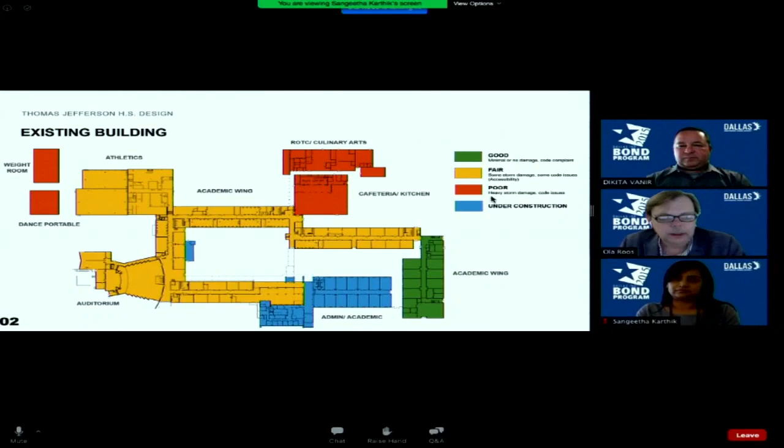So the intent here is to show the project development from the start, right after the tornado, to where we are today, and how we've incorporated the input from community and stakeholders along the way. So we're going to have about a 15-20 minute presentation, and at the end there'll be an opportunity for feedback and questions. So what we're going to talk about today is the schedule, the site plan, how it's been developed, traffic considerations, construction, and overall school planning.

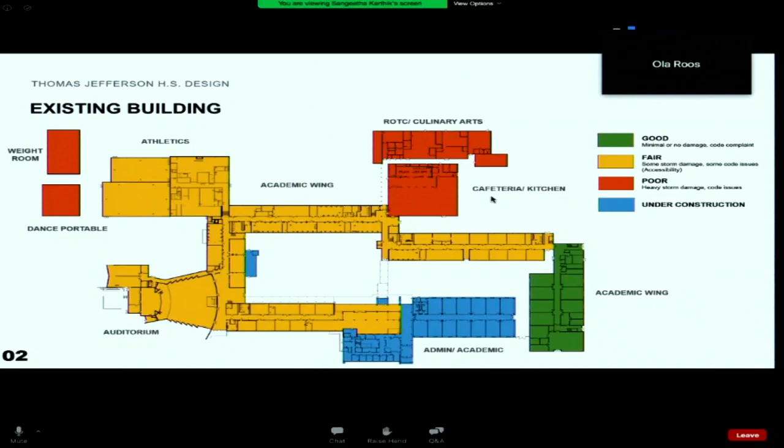So let's move on. Well, this is the existing school and assessment after the tornado. The portables were all damaged beyond salvaging. And the existing ROTC, culinary arts, and cafeteria got hit pretty hard and will be taken down.

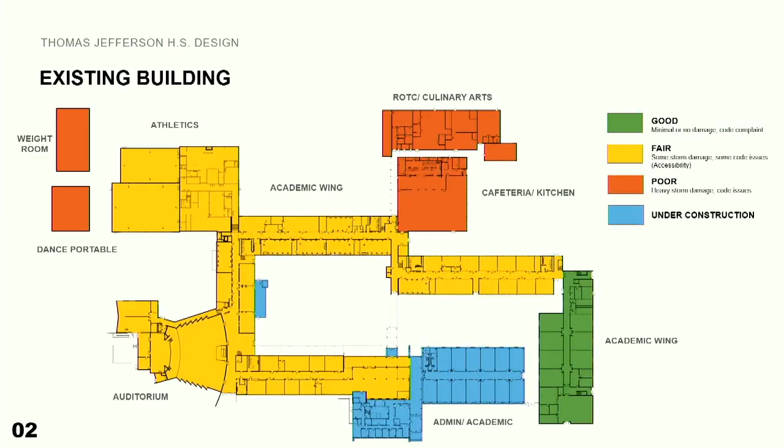So if we move on to the next slide. So what you see in yellow is what we're retaining from the existing Thomas Jefferson auditorium, the classroom wings, the academic wing, and the blue is a new addition.

We're adding an administration suite, a number of classrooms, new library, performing arts, additional athletic and physical ed, a proper competition gym, and we're enlarging the cafeteria and the culinary arts to be aligned with the current requirements, as well as their ROTC.

So we're renovating about 164,000 square feet of existing facilities and adding 133,700 square feet. Move next slide.

So this slide kind of outlines the scope a little bit more detailed. So as you see, we're demolitioning some of the 1956 building, the cafeteria, kitchen, culinary, ROTC, and the facility functions that were housed in portables, renovating classrooms, athletics, roofs, exterior windows, finishes, updates to the HVAC and auditorium. There's some renovations to the 2004 addition, and there is a fair amount of work on the site to bring it up to what's required.

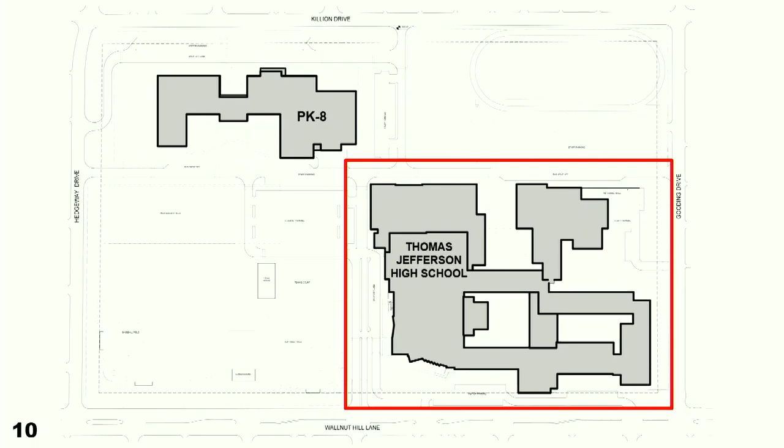One of the key concepts for the new reimagined TJ is about connectedness. We wanted to make sure that students had a seamless experience throughout the campus, no matter where in the building they were. So how did we do this? We wanted to add the additions in such a way that they stitch the building together, with continuity within the flow of traffic in the building.

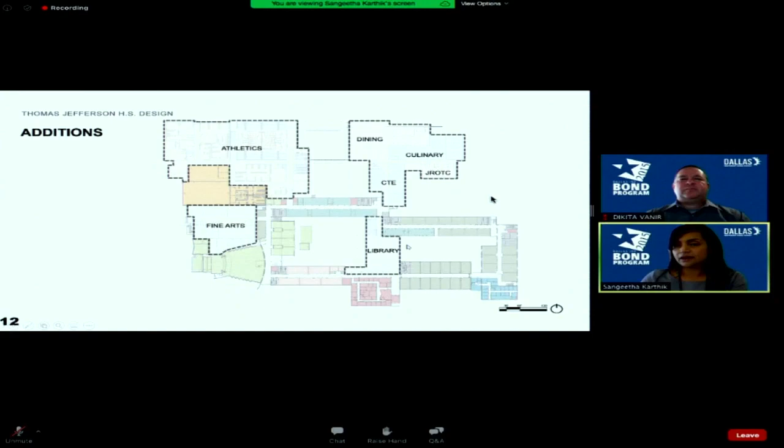So we've got the fine arts areas nestled by the auditorium. The athletic areas are connected to the old athletic areas that will be repurposed. Like we talked about before, the dining, culinary, ROTC, and CTE areas are going to be in the new addition. And more importantly, we envision the library as a node, a nucleus for the campus. This is going to sit right in the center, stitching the campus so that the circulation throughout the building is continuous.

We also wanted to make sure that students are connected to learning, and the building itself is connected to the community. So we made the outdoor spaces very purposeful. We envisioned collaboration spaces throughout the building, some small, some large. The library itself is a huge collaboration space right in the heart of the school, where students can learn, work, and interact with each other.

The interior courtyards will be more of an outdoor learning, student courtyard type of space. And the community plaza is going to be the green space between the gymnasium addition and the cafeteria addition.

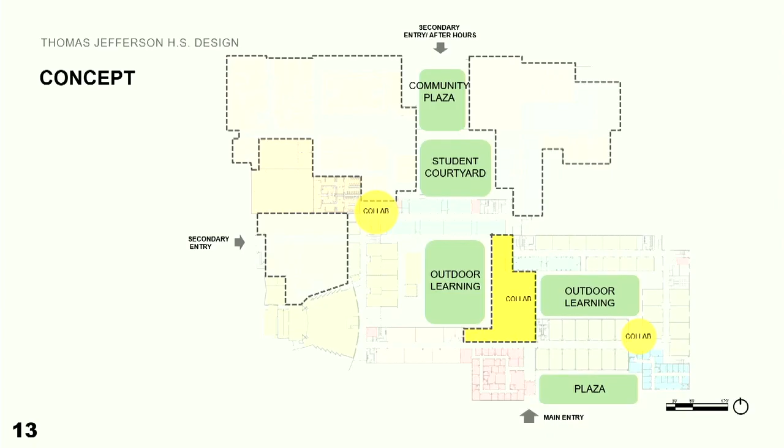Looking into the floor plan, I wanted to quickly walk you through the spaces. Reorienting everybody, Walnut Hill is on the bottom of the page. You've got the main entry over there, and you've got a new administration area that is going to stitch into some existing classrooms.

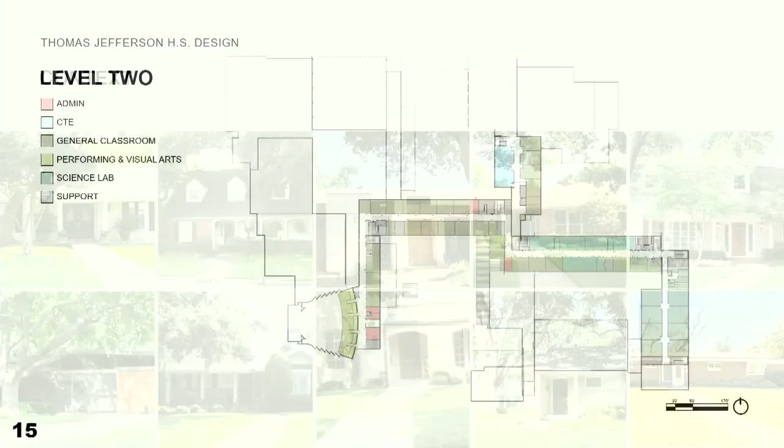We wanted to make sure that the new additions were very thoughtful and respected the context. The auditorium picture that you see over to the screen left remains, and the new addition for the entry will happen very close to it.

As part of all of the meetings and workshops we had conducted, one of the important things we wanted to make sure of was that we were all speaking the same visual language. So we had this exercise where we showed a series of pictures, trying to understand what community members, parents, Dallas ISD leadership, stakeholders, and teachers really wanted to see in the new reimagined TJ. These were some of the images that people gravitated towards.

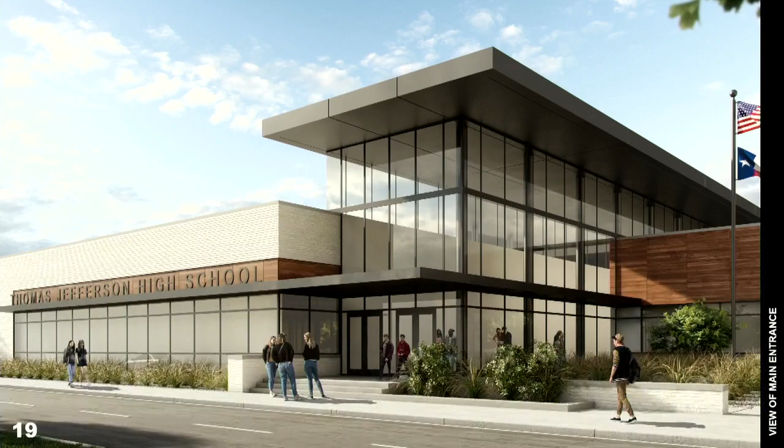So what you see over here is the main entrance for the new TJ High School. It really respects the materiality of the existing building, complementing it while adding warmth. You have a new entry that's very clearly marked, welcoming, and also safe because we are adding a new security vestibule. On the north side, you've got two new additional spaces.

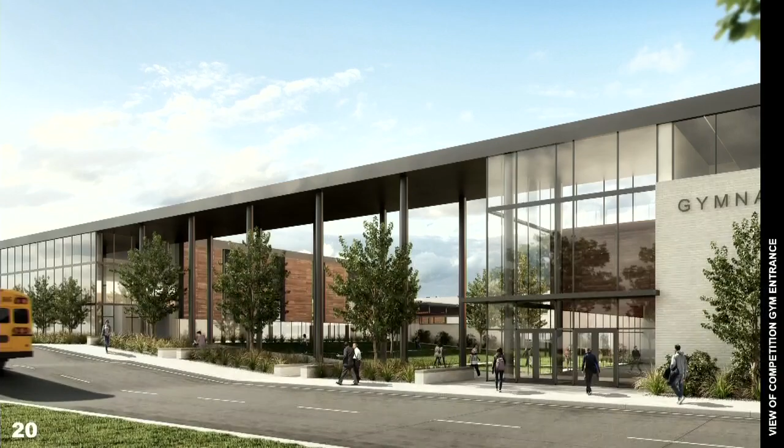The competition gym on one side and the cafeteria on the other. The community plaza we talked about serves as a student gathering space because it is where the buses drop off when the kids start and end their day. But when they have after-hour functions, this outdoor space can be used as a pre-function area. Again, going back to the concept of being connected to the community and connected to the student learning experience.

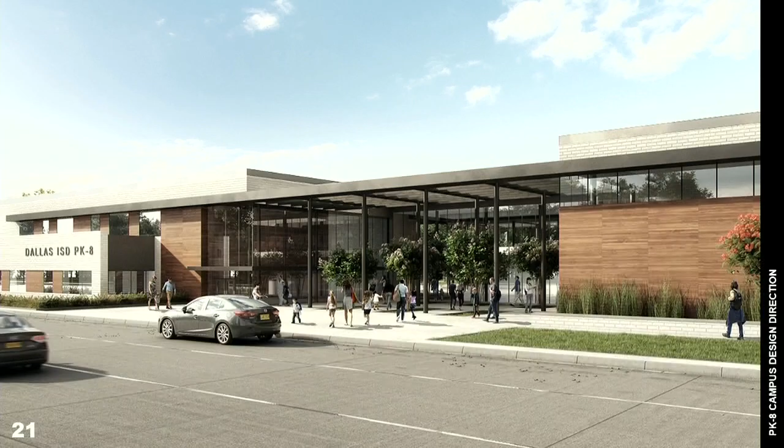We also wanted to make sure that when we did this design, it was connected with the pre-K-8, which is going to be on the other side. So these are some sneak peeks of the pre-K-8 campus. We actually have a community meeting tomorrow where we'll be talking about it in depth. We just wanted you to take a look at the exterior of the building to show that this is a family of buildings, and there is a common visual language that ties this entire campus together.

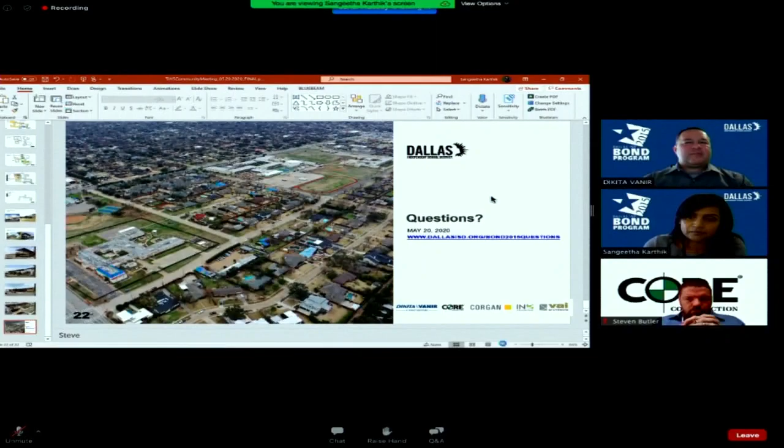And Dika, could you go back to that last slide one more time so I can see it? Slide number 21. One more. Yeah, that one. Okay.

Any questions, Sandy? No questions. I was just taking a peek, I can now see some of the elements in the drawing. It's really beautiful. Thank you.

Okay, we have question number 1 here. It says, will there be a link where we can look at the slides later and get an update on the progress? The answer to that one is yes. As soon as this presentation is over, this slide presentation, as well as a list of the comments and responses, will be posted to the district website. You'll see the same location where you went to attend this meeting, and there'll be a link there that'll give you access to this slide deck.

Joseph, I got on late, I apologize, I was on another meeting and jumped on, but you guys said, I think there's a meeting tomorrow, is that correct? Did someone say that? Yes, there is a community meeting for the Walnut Hill PK8 campus. Pretty much the same concept as today's, except tomorrow's is strictly the PK8. Okay, got it. Campus. Yep. Yeah, both campuses have been running a similar, or a parallel, design process.

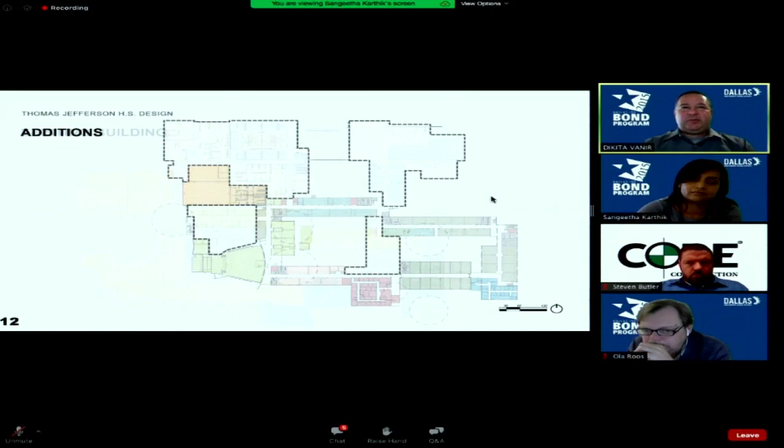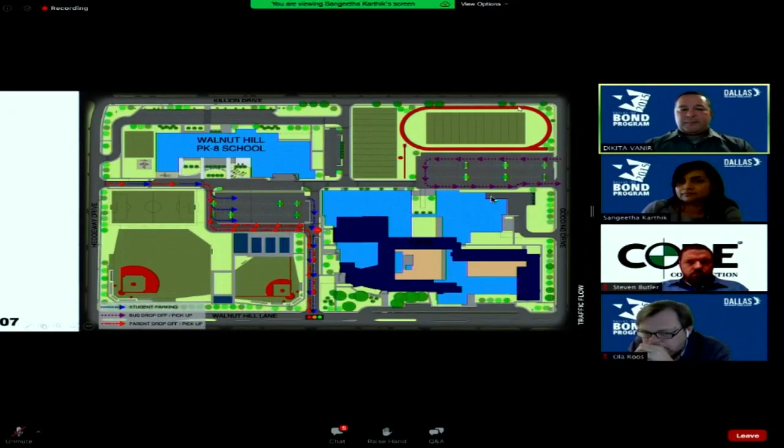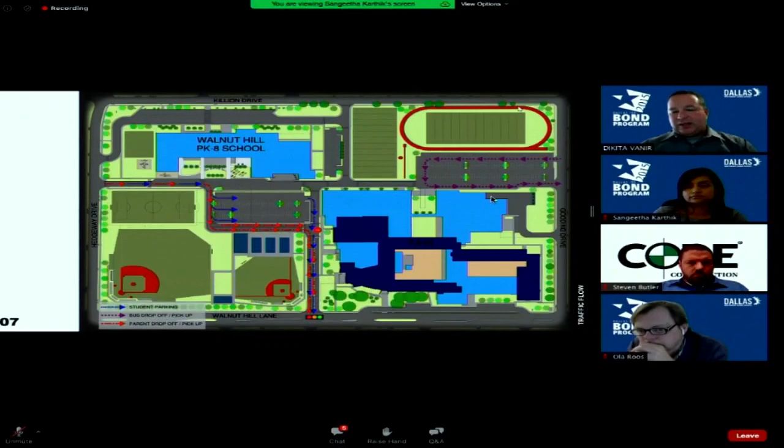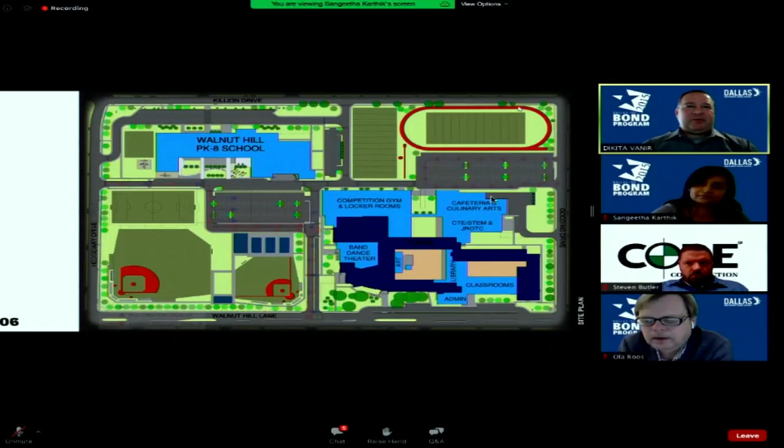All right. Ola, Sangeetha, can we go back to the traffic flow slide? Yes, Joe, just give me a minute. I know a lot of people were interested in seeing how traffic was going to be flowing. All right. It looks like we've had a large amount of people join into the presentation late. Can we go ahead and go back a couple of slides and do a quick recap of the presentation for everybody that joined us late? Thank you.

Okay, so I'm hoping I'm live and you guys can hear me. Yes, we can hear you. Okay, good. So, coming back after the tornado,

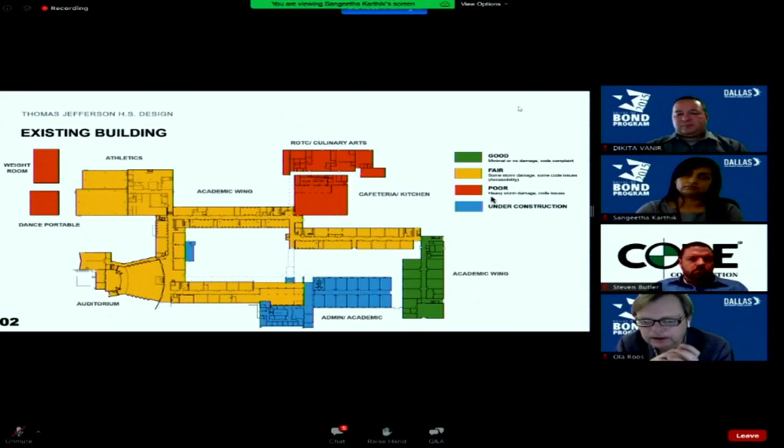there was an assessment of the existing Thomas Jefferson, and the assessment basically stated that everything portable was destroyed. So the portable classrooms, the weight room, the dance portable, as well as the ROTC and the cafeteria got hit pretty bad. So the red areas here are going to be demolished in the near future, starting towards the end of the month. The yellow areas are existing facility that will remain, but will be renovated. The blue is what was under construction right before the tornado happened. The green is the academic wing that was added in 2004, which is in pretty good shape and just needs minor upgrades or renovations. So if we move to the next one.

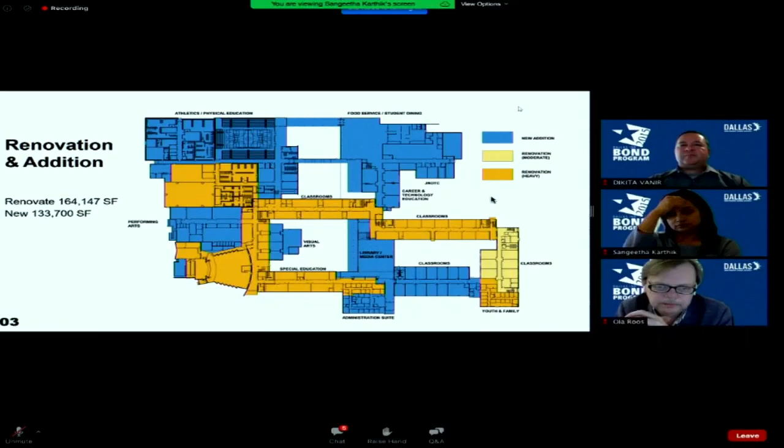So again, yellow is renovation of existing, blue is new addition, and it's a combination of what was going on and additional square footage to meet the educational requirements. We got a new performing arts area, with new library, additional classrooms, new food service, and a competition gym with athletics.

We're also adding a youth and family center to the southeast corner of the school. That was previously housed in a portable near Cary, but it'll get a more permanent home at TJ.

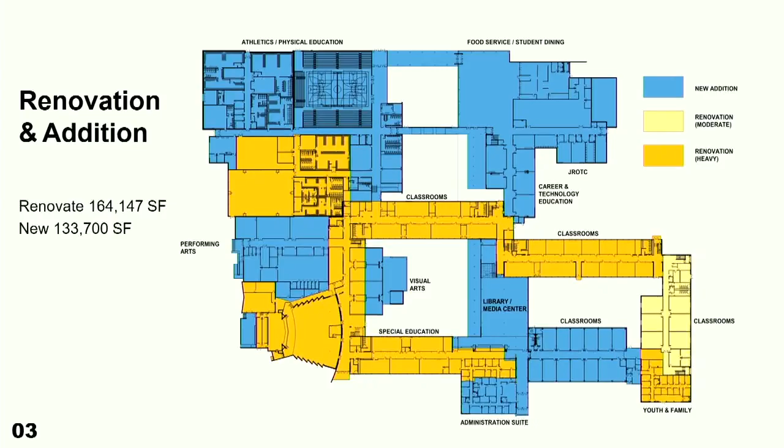We're gonna move to the next slide. This slide talks about some of the details of addition, renovation, and demolition. So again, we're demoing the cafeteria, kitchen, ROTC, dance building, and weight room, as they were pretty badly damaged.

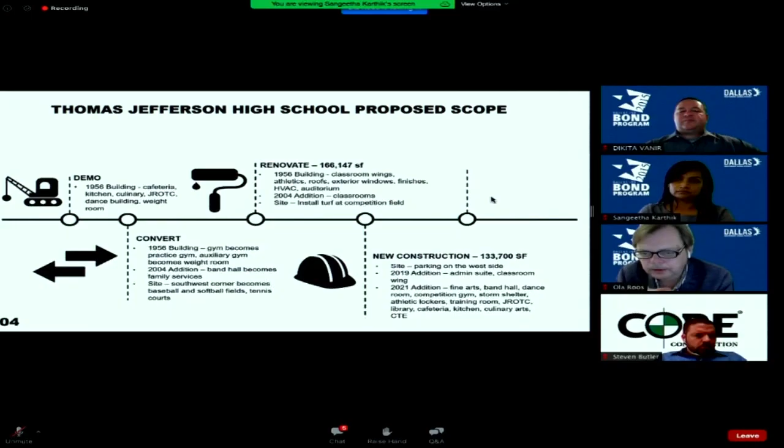Renovating the classroom wings, athletics, roofs, exterior windows, finishes, HVAC, and auditorium. The 2004 addition gets some renovation, and the site gets a fair amount of work, which I will touch on shortly. There's some conversion of the existing. Oh yeah, we can move on.

Schedule: Since the tornado, we've been pretty busy doing a lot of work with the district, assessing damage, doing some pre-design. At a board meeting in January to establish what we're moving forward with, which is what we're in right now. We're about halfway through design and documentation.

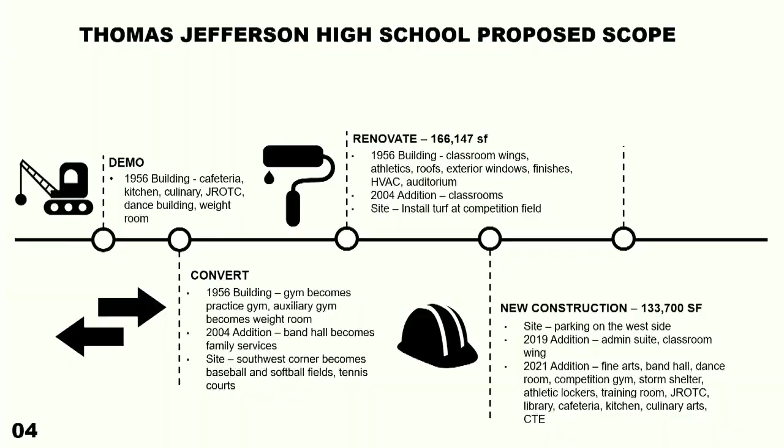And we've done a number of community meetings to get feedback from stakeholders, students, parents, neighborhood. Right now we're at the 520 TJ community meeting. We have another one tomorrow for the Walnut Hill PK8.

The contractor is going to get on site and start demoing this month. The trailer is already there, fencing is up, and then actual site construction and building construction will start September.

Vertical construction will start in January. That's the actual new facilities. So until January, it'll be mainly site work preparation. I can move to the next slide.

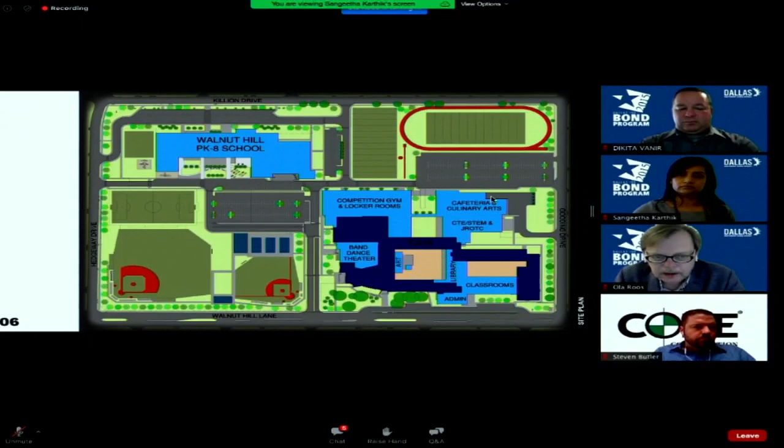So this is the layout of the campus as we move forward. And we're maintaining the football field and the track on the northeast corner, but we're relocating the ball fields. We're adding a soccer field near the PK8 school. We're adding some playgrounds and activity fields at the PK8 school.

And you can see on the Thomas Jefferson piece, we are filling in quite a bit and adding the new competition gym, the arts, the cafeteria, and a new library and administration.

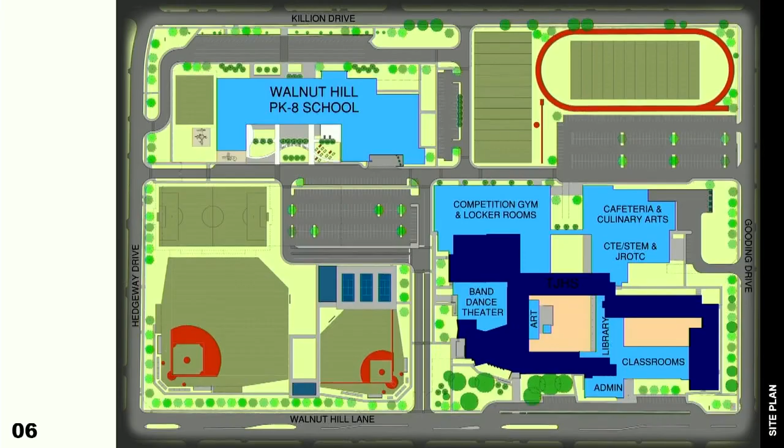And the student parking is located in the center of the site. And then the parent drop off is adjacent to that parking, and everyone on site exits onto Walnut Hill Lane.

The traffic light at Walnut Hill dates back to the 1940s and will be replaced with a smart light that can be programmed to time the traffic cycles accordingly to peak times of student traffic, both in the morning and at pickup time.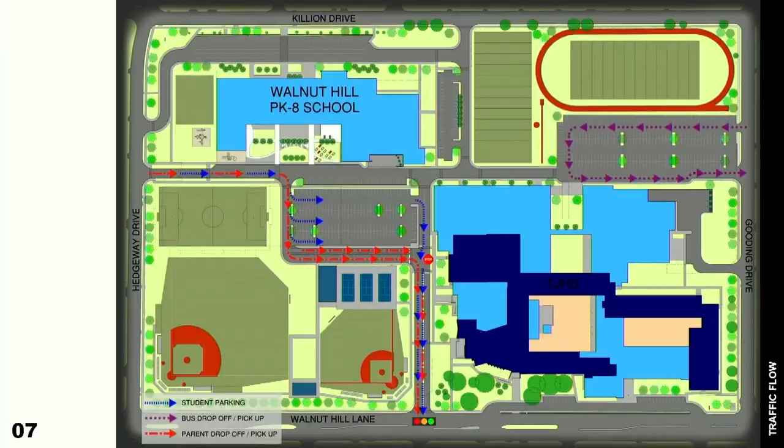Move to the next slide. So at this point, I'm going to hand it over to Sangeetha to talk about the process and the school itself. Thank you, Ola. Good evening, everyone.

We wanted to start off by saying that this process was not done in a vacuum. We started with a series of workshops and visioning sessions and meetings with the Dallas ISD leadership, stakeholders, parents, community members. And then the first question we asked everyone was, what do you want the reimagined TJ to be?

And we got a series of responses, and the four that we want to highlight here are: we heard loud and clear that it needed to be innovative, functional, safe, and welcoming. And we took all those four concepts to heart when we started designing the campus.

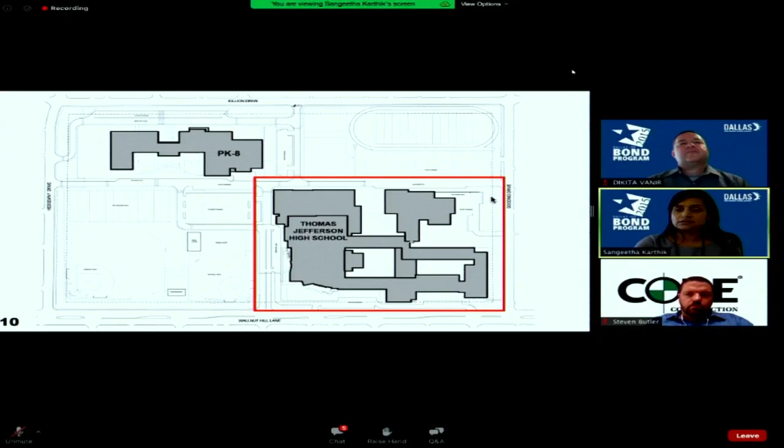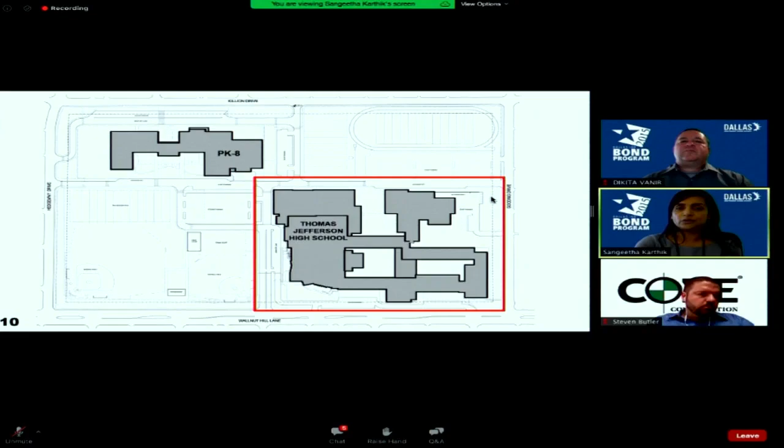So before we dive into the details, just want to reorient everyone, though you're very familiar with the building. That's Walnut Hill on the south. You see your auditorium, and the main entry will nominally remain in the same location. To the northwest of the property is the new Pre-K8 project. So when we looked at the existing building, we wanted to have a seamless campus experience for the students.

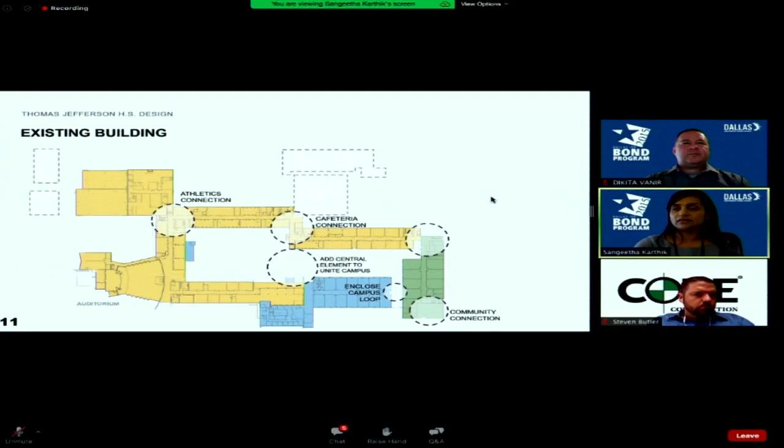So that was our main goal, to be able to connect the campus internally so the kids can connect to learning, and then the building itself connects to the community. One of the things that we looked at was how can we infill these new additions in such a way that the circulation within the building is easy, so you don't have to leave the building if you don't choose to.

The community connection we also talked about is in the Youth and Family Center, which is on the lower right side of the screen, which has a separate entry and access that'll be serving community members.

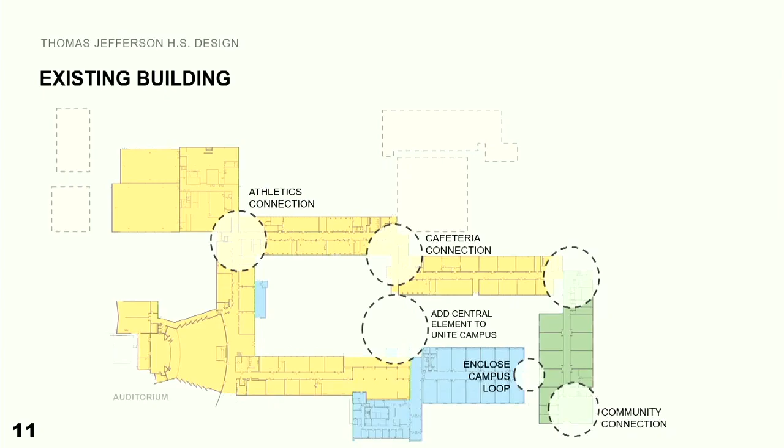So how did we do these additions? We basically stitched these additions into the existing campus. You've got the fine arts area that's nestled very close with the existing auditorium. Existing spaces will be repurposed and there'll be new fine arts spaces. The athletic portion is going to be mostly in the new addition, but the existing athletic areas will also be repurposed and renovated. The dining, the culinary, the CTE functions, along with the JROTC, will be in the new addition.

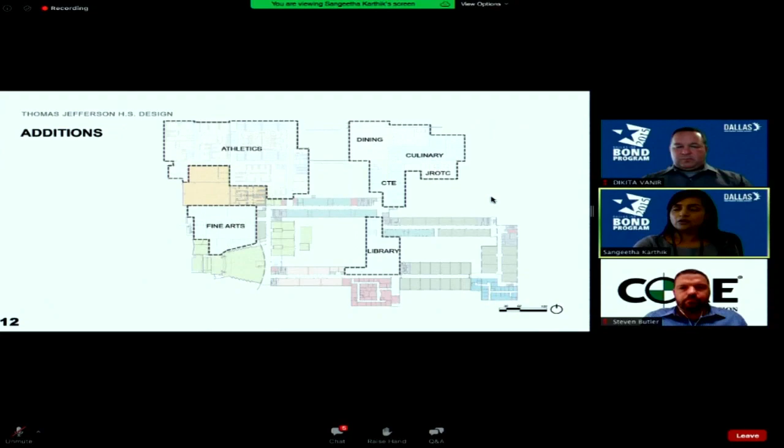And the library serves as a node or a nucleus for the campus, which is going to be your central collaboration space, which connects the campus throughout between the classrooms along with the area.

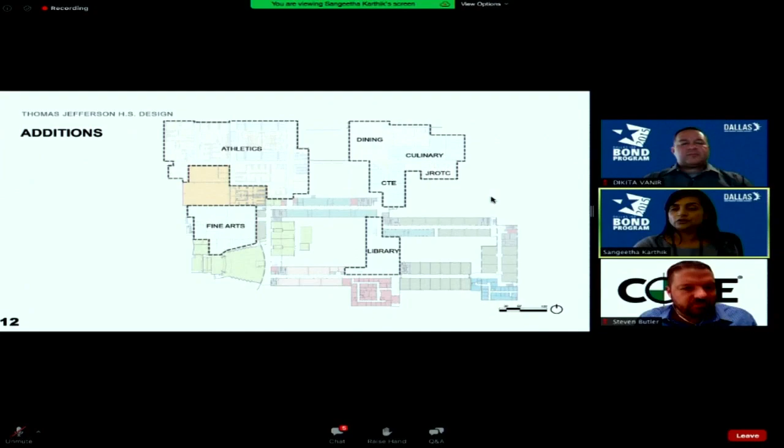So the campus concept again goes back to the students' connections to the learning experience, as well as the building's connections to the community. So we envisioned a community plaza, which is a large open space on the north side over there, which would be a pre-function area for your competition gym, for your cafeteria after hours. Also during the day, that's where the kids get dropped off by the bus. And so it could be a spillover space for students to hang out.

The rest of the interior courtyards are partly or fully enclosed and will serve student functions. Internally, we envisioned these connection points, which would be collaboration spaces, some of them large, a couple of them small. The idea being that the library would be the central zone where the students can congregate to learn, to work, as well as to interact with each other.

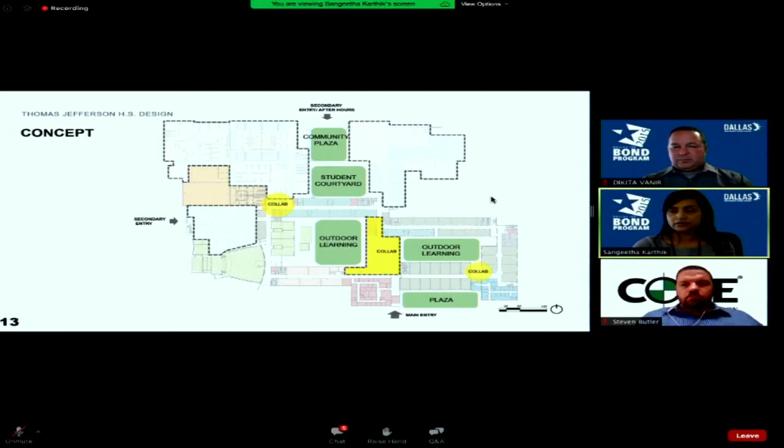So this kind of translates into a floor plan, and I'm going to quickly walk you through the spaces. Again, the main entry is on the south. What you see in pink is the new administration, which stitches some of the existing classrooms. You've got the existing auditorium with some new fine arts and performing arts spaces.

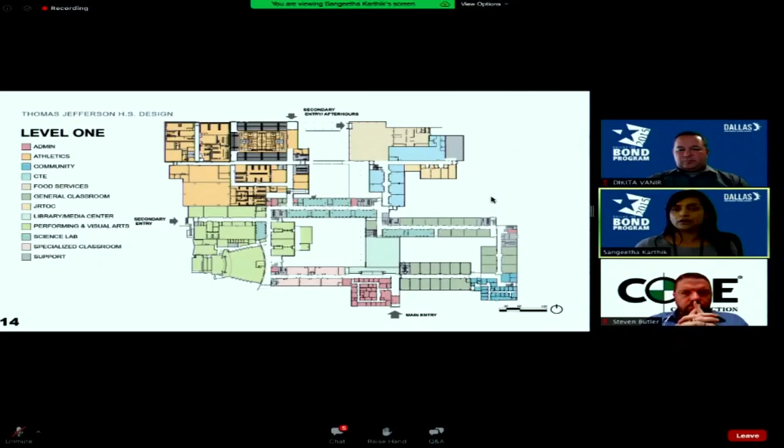Some of the existing athletic areas are refurbished for athletic function, and you've got a large addition that has a new competition gym along with the necessary locker rooms. You've got the cafeteria, the culinary arts, ROTC, and the CTE spaces. All of the existing classrooms will be renovated.

That's your new library connection that we just talked about. There's also a new bank of classrooms, the youth and family center with exterior access. What used to be the collegiate wing will undergo some minor renovations. So that is the first level.

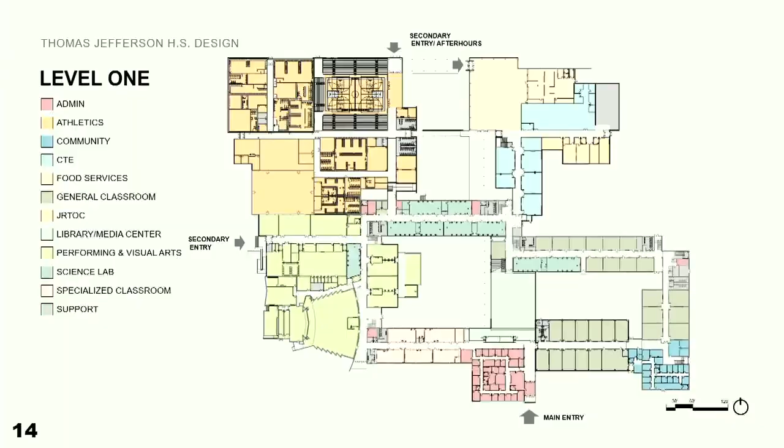The second level largely has classrooms. The only difference being that with the library connection, there is an area that allows the kids to enter the library directly from the second floor to the first floor space. There is also a maker space and some collaboration spaces that would be added to the second level of the building.

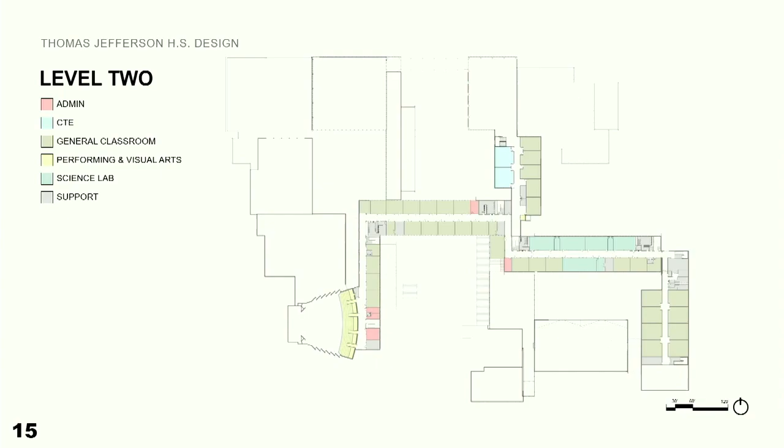So when we looked at the exterior aesthetic, we wanted to be very thoughtful and respectful of what the existing TJ had to offer. And since the auditorium is going to remain and the new entry area nominally is in the same location, we made sure that the materiality and the lines of the building blended and complemented what was already there.

Like we talked about, we had a series of workshops with different groups of people. We wanted to understand what everybody's visual preference was. So we showed a series of pictures. These are just a couple of pictures that a lot of people resonated to and they gravitated to. So we used some of these images as a springboard for the new design.

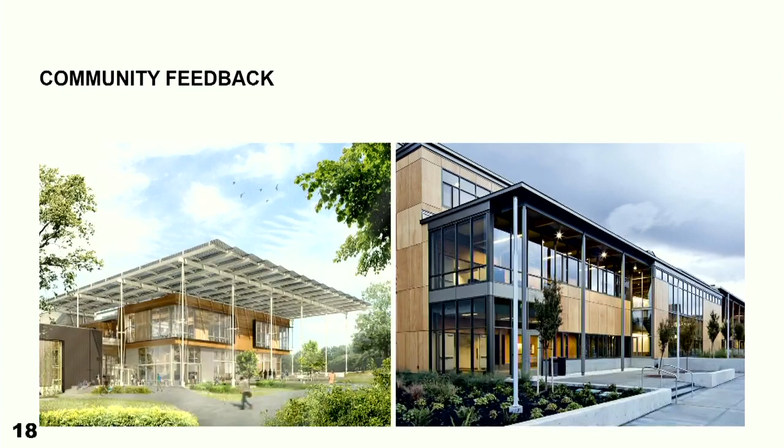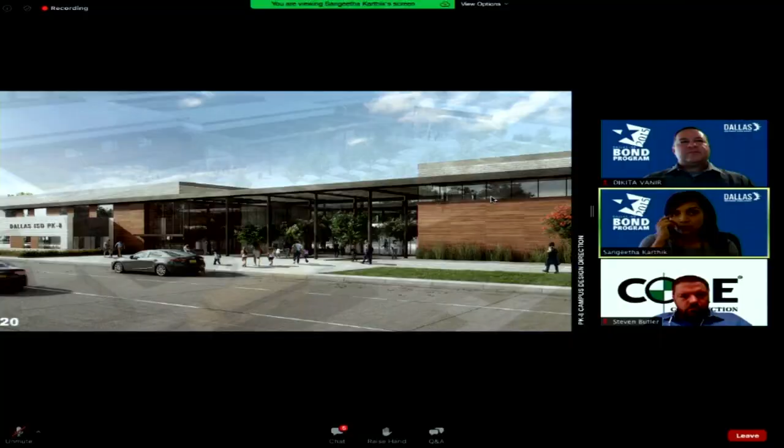This also serves as a pre-function space when there are large events in the cafeteria or the gym after hours. We wanted to give you a sneak peek to show that when we designed this building, we wanted to be thoughtful of what was going on across the entire campus. This is the pre-K-8 facility on the other side of the site. We have an upcoming meeting tomorrow where we'll discuss the design in detail. But we wanted to show how the lines of the building, the aesthetic, and the materiality complemented each other. The existing TJ was the inspiration for both the addition for TJ and the new pre-K-8.